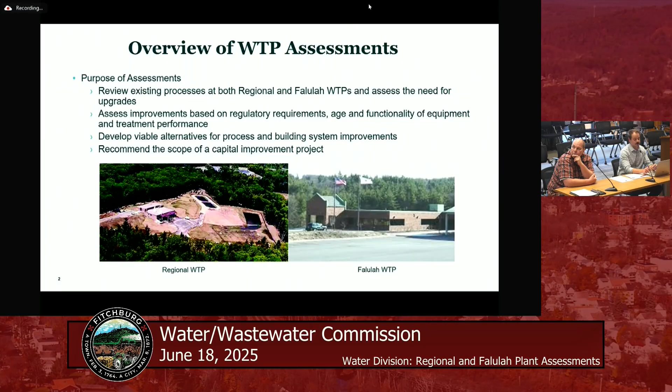So I'm going to touch on just one regulatory change, but when we talk about the regulatory landscape shifting around the plants, just one specific instance is the information up on this slide, which is a recent change to the NPDES discharge permit for the water treatment plants. These changes are changing how much aluminum can ultimately be discharged from the plant.

The city uses an aluminum-based coagulant right now at regional. We just, as part of this study, did a bunch of trials. We're now looking at moving to a ferric or an iron-based coagulant as an alternative to that process to meet this changing NPDES regulation.

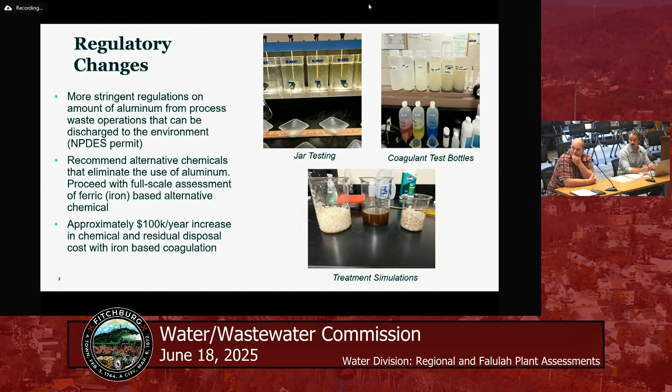And with that carries a substantial change to the operation and maintenance that the city is paying for. So we're trying to look ahead at, well, under this capital improvement project, and identify areas that we can invest in and make things better, and also tackle some of these things that have cropped up along the way.

So diving into regional a little bit more, the facility is at that 30-year inflection point. That second bullet John touched on, but it's worth repeating. The treatment plant runs 24/7.

It has not been offline for a full day since it went online. It is absolutely critical to the water supply of the city of Fitchburg, as well as the town of Westminster, which pulls all of its water directly from it as well.

The city has been investing in this facility, just replaced the roof of that facility, like within the last week. That project basically wrapped up. But again, we're at that inflection point where there are numerous treatment processes, there are numerous building systems that really need to be examined and brought up.

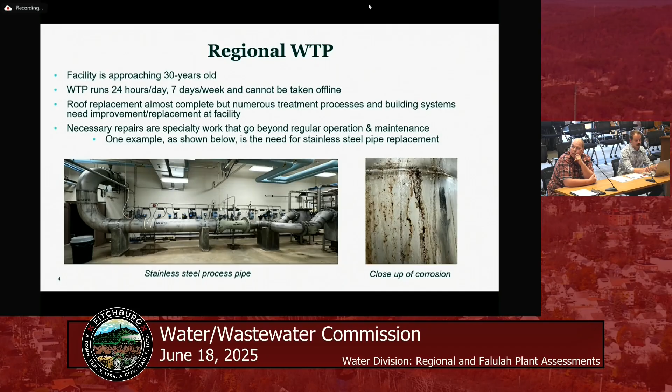And these repairs are really beyond the scope of operation and maintenance. They are significant efforts. One of them is up here on screen, but this is the primary stainless steel piping, the raw water piping into the facility, that's starting to show signs of corrosion. So the takeaway from this slide is it's a very complex problem, and it provides or requires complex planning to ultimately pull this off in a way that maintains the functionality of this plant.

A couple other items we'll touch on: the filters providing primary treatment have reached the end of their useful life at regional, and the generator is another item that has reached its useful life. But there may be an opportunity here to switch to natural gas with the new unit, same concept with the boilers inside the plant itself.

The assessment also took a look at and is ultimately recommending a shift from chlorine gas over to liquid sodium hypochlorite in the treatment process, which should result in a cost savings and improvement to safety. It's easier for the operators to handle.

I think the theme of the last three bullets is that as part of a capital investment, there's also a lot of opportunity for increasing efficiency of how some of these systems work, improving safety, and lowering some of the overall O&M cost to operate these facilities.

If I can interrupt for a second, when the plants were originally designed, chlorine gas was determined to be the least costly for disinfection. However, that's changed. Part of it is just the danger of it, realizing there's terrorists out there, things that could happen. So now it's become more expensive to treat with.

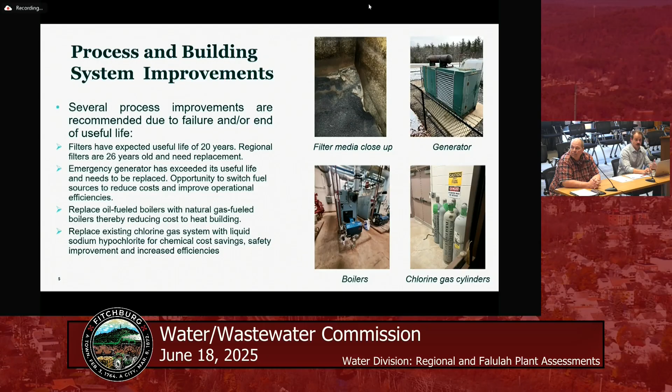So that's just an example of one of the things we looked at, that things have changed significantly since then. And kind of John touched upon this earlier too, but the whole cost metrics of natural gas have completely shifted now. So looking at including natural gas at this facility may be a significant change in the O&M as well.

So we spent some time talking inside. Also want to point out some exterior improvements. But effectively, this project likely includes inclusion of a third lagoon. This is, again, really tied to that regulatory change of aluminum discharge. Moving to an iron-based coagulant is going to result in more solids production, so getting a third lagoon in here is going to increase that operational flexibility and the redundancy of the overall system.

But again, on that backdrop of regulatory changes causing capital change, this is a good example. As Sam mentioned, there's about $100,000 additional cost switching to the ferric-based coagulant, but that mitigates millions of dollars of improvements that would have been required here to remove the aluminum. So we're spending $100,000 more a year, but we're saving a lot. We're still going to add a lagoon up there to help with managing the residuals.

The other thing we looked at is that we take those residuals and bring them to the wastewater plant. Well, eventually Mark's not going to want the aluminum—he probably doesn't want it now. So we're trying to look out not just for us, but also for them too. We don't want to affect their operations and cause them to go over their permit.

So that's the other part of this equation: we don't want to cause any additional costs for Mark either, because we still got to get rid of our residuals, whether they're aluminum based or iron based. So the overall savings will be significant, even though there's a $100,000 additional cost associated with this switch.

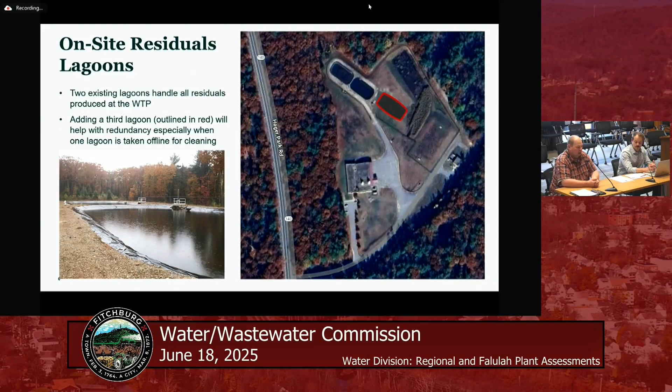Shifting gears over to Falulah, but some of the same themes that we've really been talking about. Falulah is a little bit newer facility than regional, but it's also 20 years old, and the filters are 20 years old, and they've reached the end of their anticipated useful life as well. So targeting a filter replacement as part of this work.

The city's done a lot of work trying to combat changes in water quality over the years by changing operating procedures and things like that. But this provides an opportunity for the city to address some of those in a capital manner as well right now.

The heating system at Falulah has been identified as something that needs further study and modification. I think the water department's estimating up to 150 gallons of oil usage per day at Falulah. There's got to be a better way. So reduction of that fuel capacity, and again, the theme of can we use capital improvement to alleviate O&M cost? That's going to be a major goal of this.

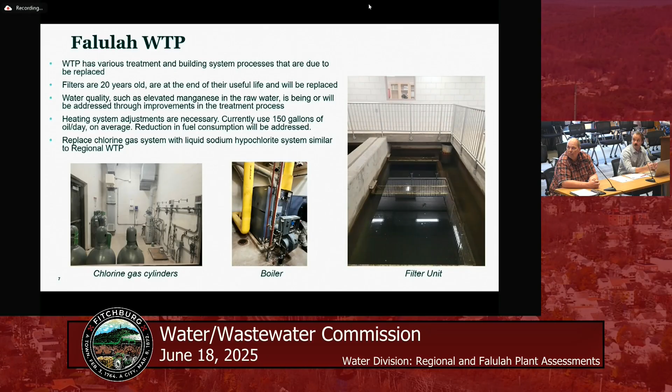And then last bullet, again, is just the same concept of moving away from the chlorine gas and towards a liquid sodium hypochlorite for disinfection for all the reasons that we've talked about.

I want to move on a little bit from that. You could just go back for a minute. Some of the other systems - we have a blower that does backwashing, basically used for backwashing clarifiers and filters and things like that. That blower, there's only one at each plant, and we've had them repaired, rebuilt, and now it's time to replace them. I don't know why they didn't build redundancy, and there's not enough room to add to it.

Compressors there at each plant run the air valves that open and close. During a backwash cycle, there are many valves opening and closing at the right time, and they're all actuated by air. One thing that was never built into the plants was redundancy - they should have put two compressors in each. We bought a backup compressor that we could bring to one plant or the other.

Now that runs off gas, we'd have to put it outside to hook it up until we could get something repaired. But we need to look at something a little better than just that for the plants, so we don't have issues, because we actually had Falulah go down for a while because the compressor failed until we got another one in there and all connected in.

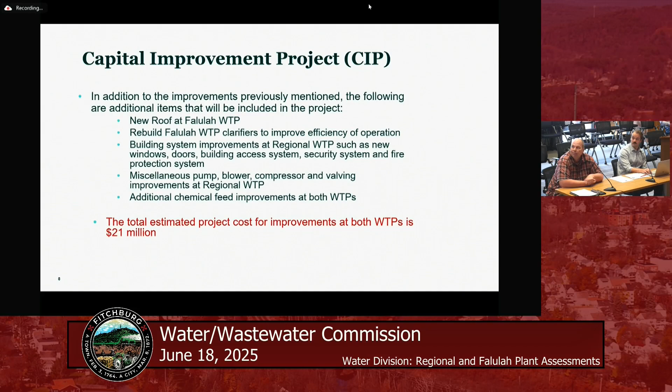Just to kind of wrap up and go on top of the capital improvement costs that just got shown, something that we're always kind of looking at is that change in regulation and how changes being made, or what the regulatory landscape is, and how that affects investment, how that affects operation and maintenance. So the elephant in the room for water quality right now and water treatment is always PFAS.

I'm going to talk a little about that right now. Just be aware this is still developing guidance. Right now, the EPA is looking to hold implementation of a 4 parts per trillion standard for both PFOA and PFOS. That's supposed to be effectively put into effect in spring of next year, which would take effect in 2031.

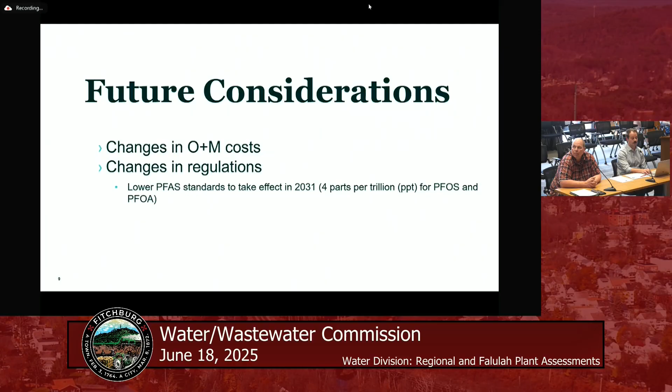So where does the city stand right now on the PFAS front? The most recent sample data is up there. I'm going to read it because I know it's a little small, but it's about 3 parts per trillion PFOA over at Regional, and about 1.6 in PFOS. For Falulah, it's about 1.5 parts per trillion PFOA, and currently non-detect on PFOS. Oh, that's good.

That is the current data. Historical trend generally supports that. This is not one data point that the city's hanging their hats on here. Your data has consistently been at these levels. You have consistently been below 4 parts per trillion.

Again, in red, the takeaway from this slide is PFAS changes the equation greatly in terms of what you're talking about for capital expenditure. You're looking at about approximately $20 million additional expenditure per water treatment plant if PFAS becomes part of the equation. So just want to put that out there.

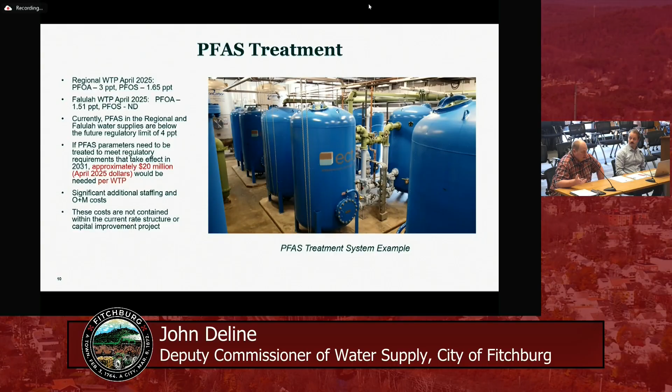The fortunate thing is we've protected the watershed, all the work we've done protecting the watershed and minimizing development has helped keep down the PFAS. We have less development in the northern watershed, and guess what? PFAS levels are lower in the northern watershed than they are in Westminster because we have fewer major roads and houses in general, so you can see the difference that it makes.

So we're fortunate we don't have a large source of PFAS, some type of shop or something like that in the watershed. Fortunately, industrial development in Westminster is not in our watershed. It's all toward Route 2.

So hopefully we continue at those levels. We monitor them quarterly and we'd let you know if anything changed. But that 4 parts per trillion threshold is very low, and we're a little bit below it. The trends we've seen are that we're going to be okay, hopefully.

But if it's not, we could be facing a huge expense, and there's just no monies out there. They have the state revolving fund, funded by federal money, which may or may not be cut, but that's just a low interest loan. It doesn't actually give you a grant or anything like that. There may be some loan forgiveness for Fitchburg, but we'd still have a good portion of that, and we'd have all the O&M too.

So just concluding again, we'd love to get all the PFAS out of there for the customers. But the bottom line is, I've mentioned it before, this isn't their main exposure. There's a little bit in here, but it's everything else in our environment—your stain-resistant clothing, your Gore-Tex, your popcorn you throw in the microwave, your coffee cups, it's in everything. This is not a route of exposure causing any harm compared to everything out in our environment. We'd like to remove it all, but it's just not feasible. We can't remove every little piece that's out there.

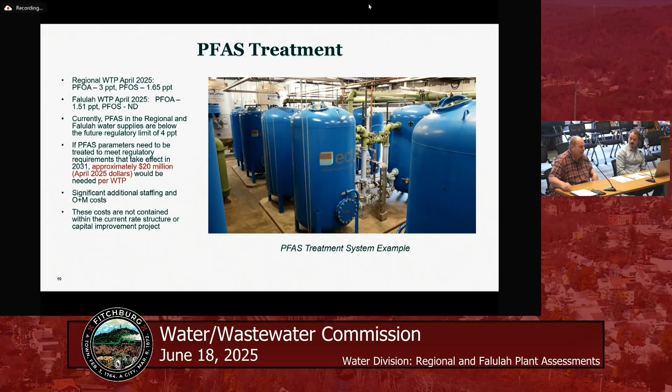That's effectively the end of the presentation. Now on to the more important part—what questions do you have that we might be able to answer? Questions for Sam?

What is the time frame for this, the $21 million? It's a couple years out, so we're looking at completing the engineering and going out to bid toward the end of 2026 or spring of 2027, and then a year or two project after that. So it's a ways out.

We are updating the water rate study. Some of this stuff has been pushed off because when we started seeing, we had anticipated some of this work, but we started looking at all the building systems together. We said we're going to put a bigger project together, because if we try to accomplish these separately, it's going to be too costly. So that's what we're looking at. We will have an update.

Nick, do you know when the rate study will be? I think we're shooting for ultimately giving the presentation to City Council sometime in September. So we'll have an idea.

We're just looking at the borrowing rates, which have gone up of course. The SRF funds, we're not sure about that with everything that's going on, so that may change some of the borrowing. A lot of the SRF funds for drinking water have gone to PFAS mitigation projects. That's why we couldn't get it for some of our water main projects. The last thing we got was for the Oak Hill storage tank, but we applied for Meeting House, Gatehouse, Merrimack. We've applied for all those, but that tier of money we just fell out of was going toward PFAS projects all across the state.